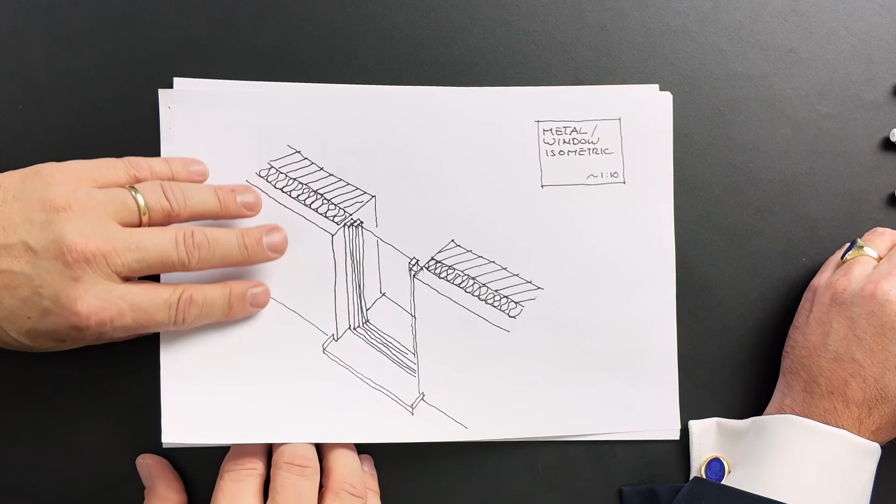So this is the general geometry, general layout. This is a section floor plan with very global positioning of the punched window in the facade. This is the aluminium version of the punched window in a ventilated facade.

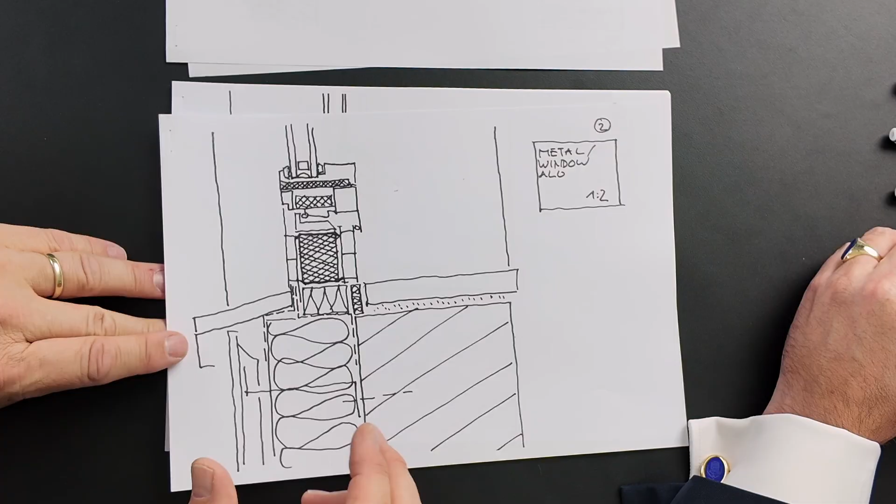We need to talk about how things are fixed, but we'll do that later in the deeper details. This is the wood version, and this is the aluminium version. I'm aware you're more into metal and aluminium, so this may be your favorite. This is the wood version.

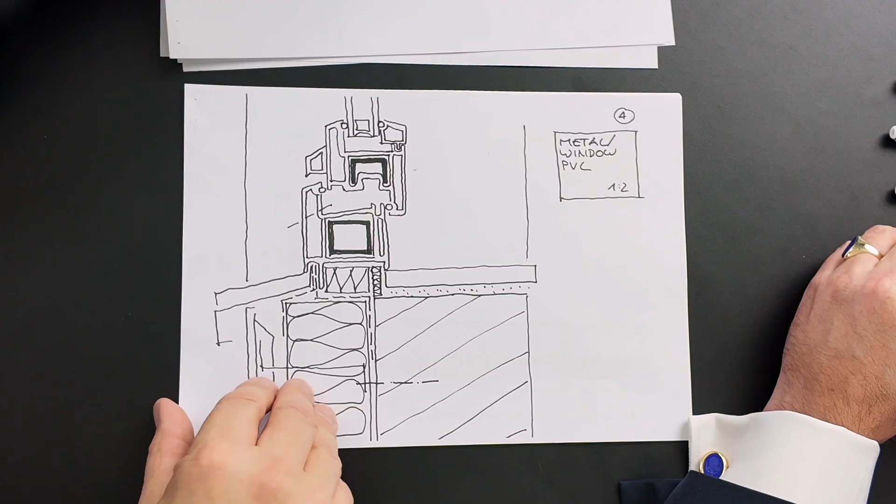In general, it works the same, also with the windowsill. And then the plastic PVC version as a setting.

Lines of defenses - anything I need to take care of from your perspective as someone who's installing it? I drew these dotted lines, they look nice, but I have to take care of the details. This is the setup which you would agree on as well.

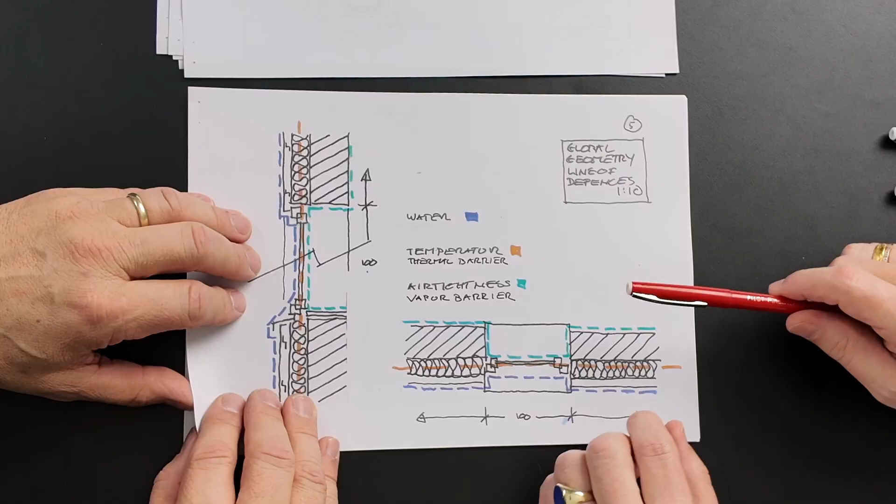Yes. So these 3 lines of defenses are very good for orientation for construction, because when you have to think about the right position for the window, it gives you a better indication of where to place it. The positioning of the window could go inside or outside, and you have to think about how the line would work.

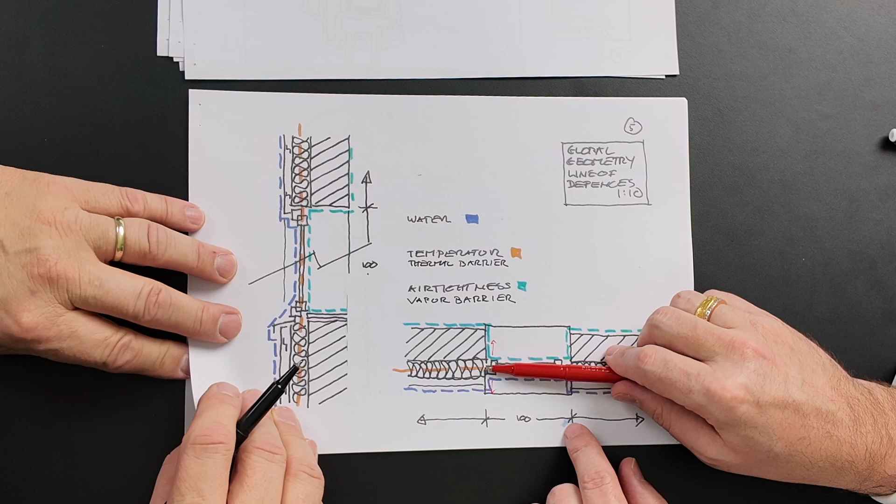In this case, it's idealistically drawn - the profiles and the zone of insulation of the window are directly in the line. Of course, aesthetically I could imagine having it more here or more here, but then the line of defenses would start shifting. I hope I've transferred it into proper detailing later.

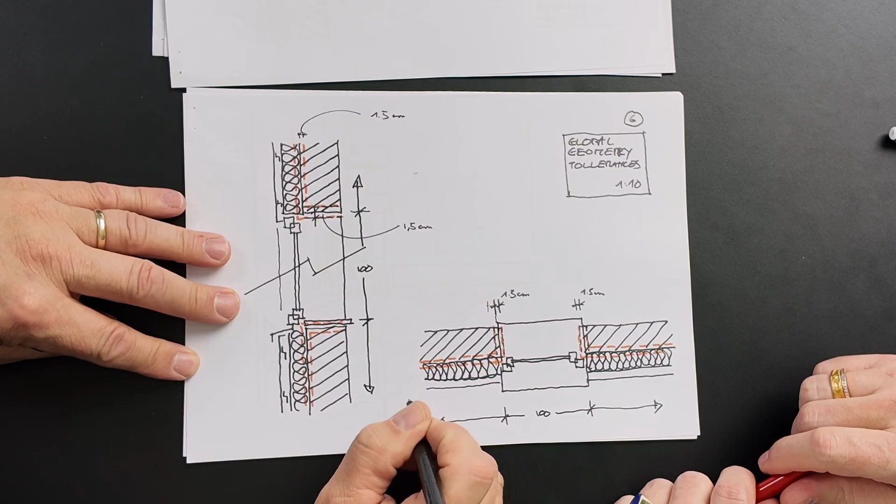Tolerances - I allowed myself a tolerance of 15 millimeters in one and 15 millimeters in the other, which means this is the line where I assume the main structure is, but I allow it to be either 15 millimeters wider or smaller. Is this something you would be happy to accept?

It's a point you have to consider every time. Normally on theoretical plans you won't find this inside and outside line of tolerances, but you have to consider it during construction. You have to point out how you can work with it.

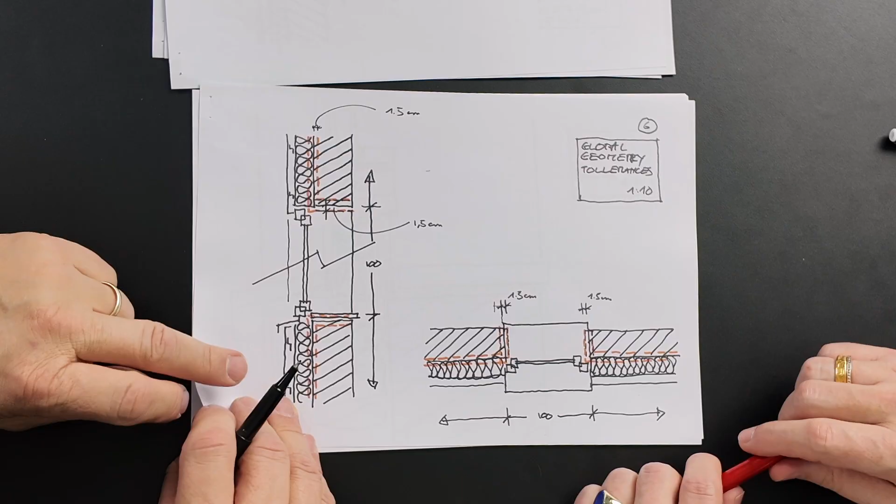If it's for one punch window, then it's not a big problem. I think in Germany the tolerances you have to calculate and incorporate in your construction is plus minus 15 millimeters, but it becomes more problematic if you have a punched window system or array in a ventilated facade, because then it becomes a kind of grid.

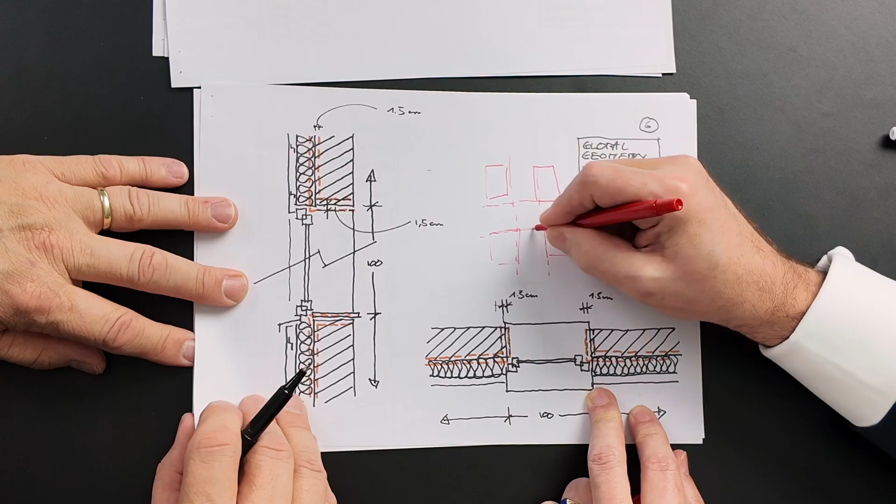And when it's a grid, you have to think about how to deal with the tolerances. So this becomes something and this becomes something, and the lines are not straight anymore. Then it becomes more problematic - you have to think about how to cover these tolerances so the ventilated facade and the panels remain the same. You need an overlap to cover the tolerances that come from the building shell.

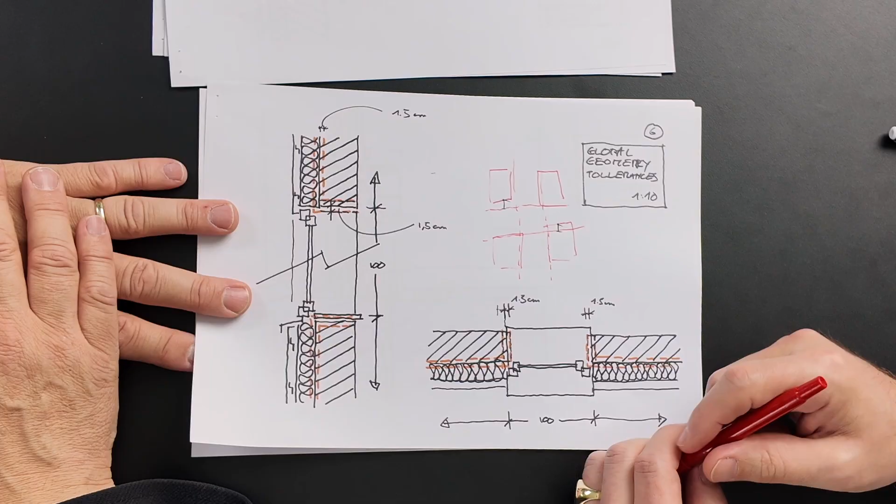So that's a strategic design decision - exactly where to put the lines in position relative to the windows. Yeah, that's a clear point.

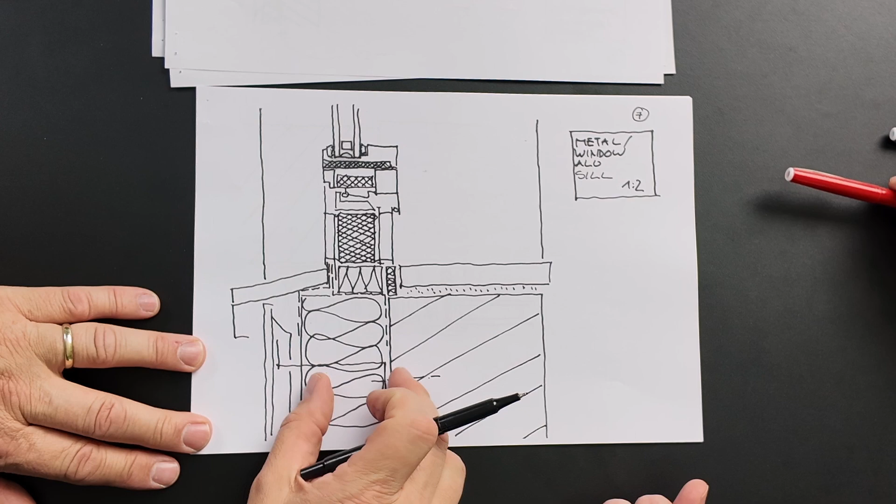Okay, let's come to the detail. This is the main vertical section - windowsill, ventilated facade, insulation, load-bearing part, the aluminium window, and then the line of defense - the outer rain, the inner air tightness happening here, and then the window itself.

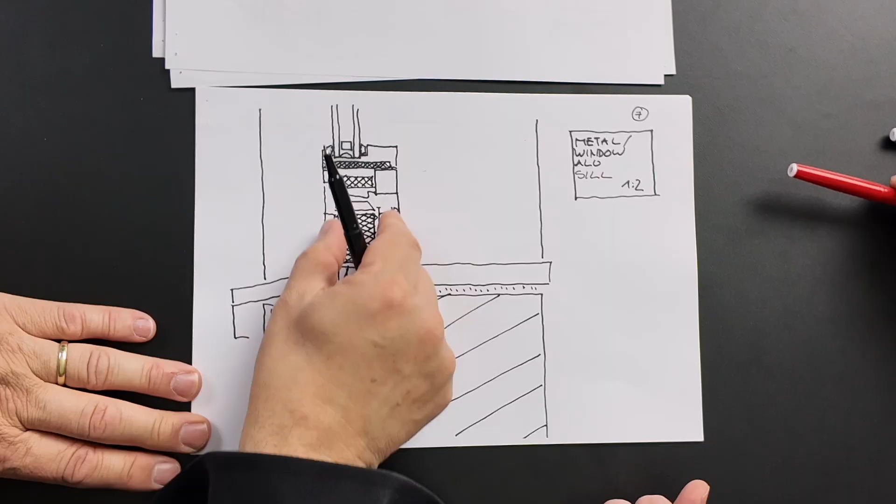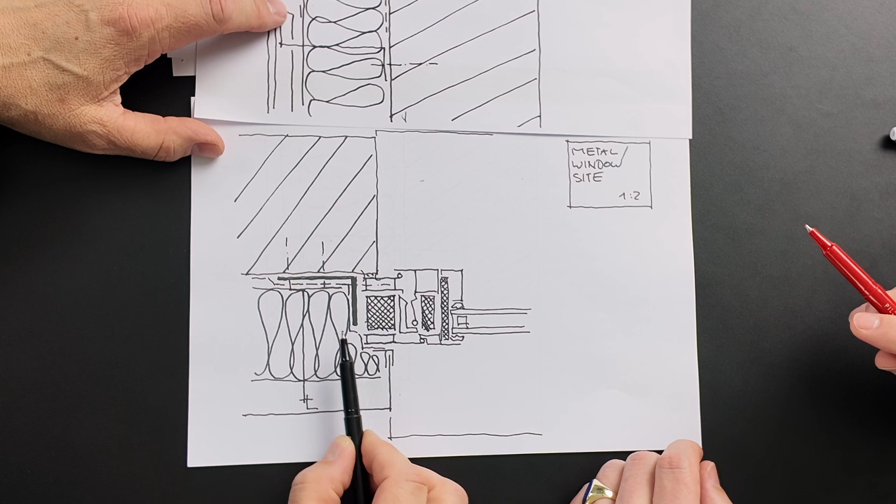Okay? It looks fine, it looks fine. Sometimes you have to think about how you want to place the fixing and the opportunity to fix the window itself. Yeah, I fixed the windows at the side - this is side window, horizontal, and this is where I fixed the window. So I have 3 brackets to position the window.

Body language tells me you're not happy. It's doable, but normally, maybe we are special, but normally we are used to doing it with a bracket - at the bottom where we have a bracket that can cover the dead load.

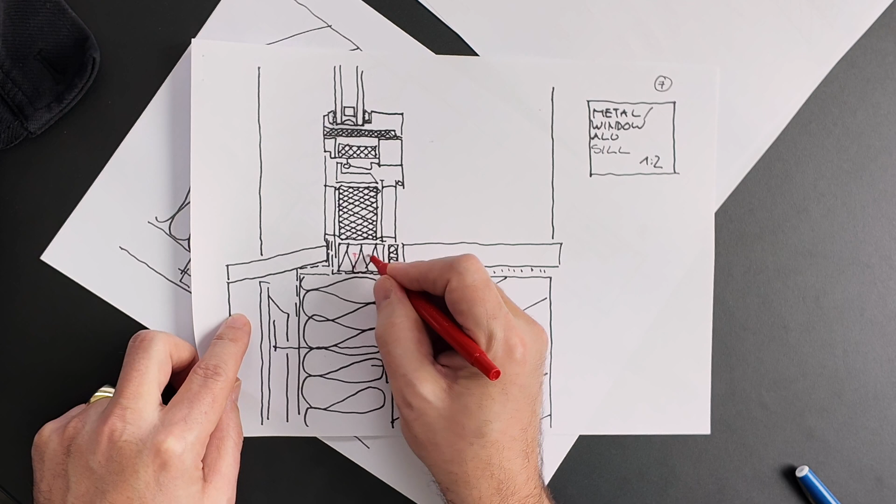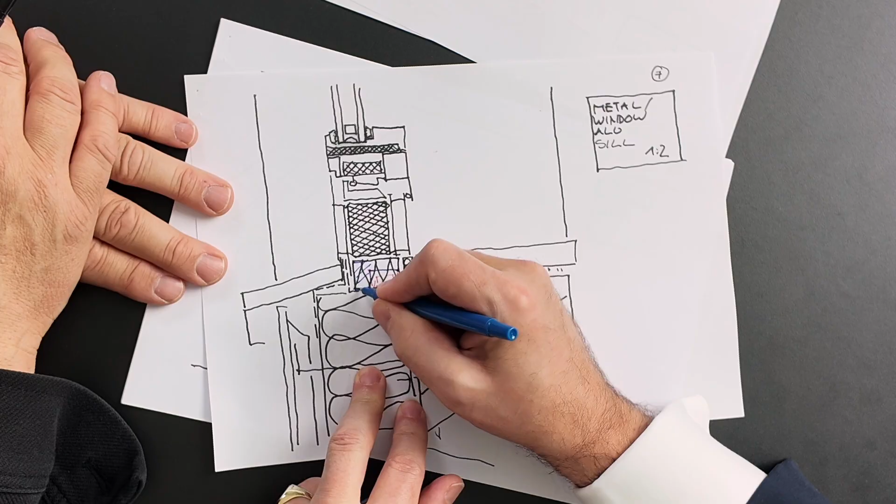And then you can think about a pressure-resistant PVC that can cover the dead load, or a steel tube in a way that's covered with pressure-resistant thermal insulation - let's take blue - that covers the steel profile to avoid a thermal bridge. Because otherwise it would be too close, and this may become a thermal bridge, okay.

And then I have this aluminium bar, this steel bar, which goes this way to cover the dead load, and then this is fixed to some brackets which are then fixed into the concrete.

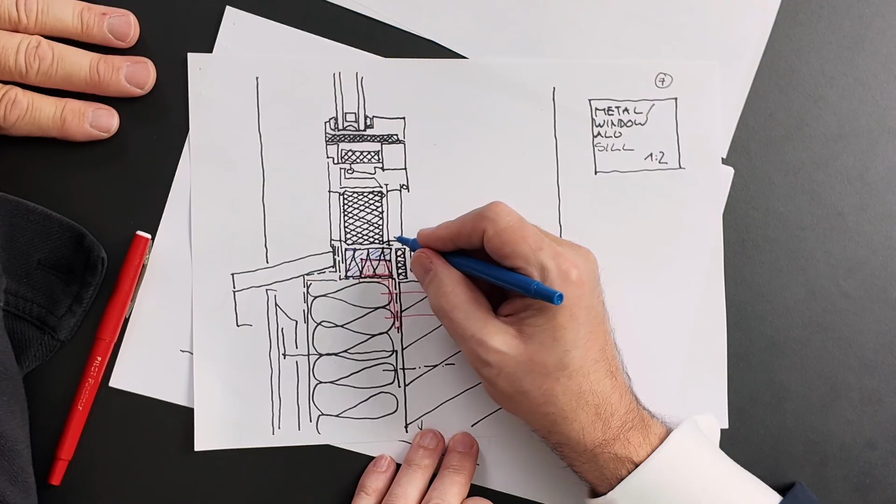So it needs to be placed correctly, because you can fix it through the profile that goes in. Actually this needs to be more here, so that we have a fixing point that can also carry the dead load and partially the wind load too. Okay, this is for dead load.

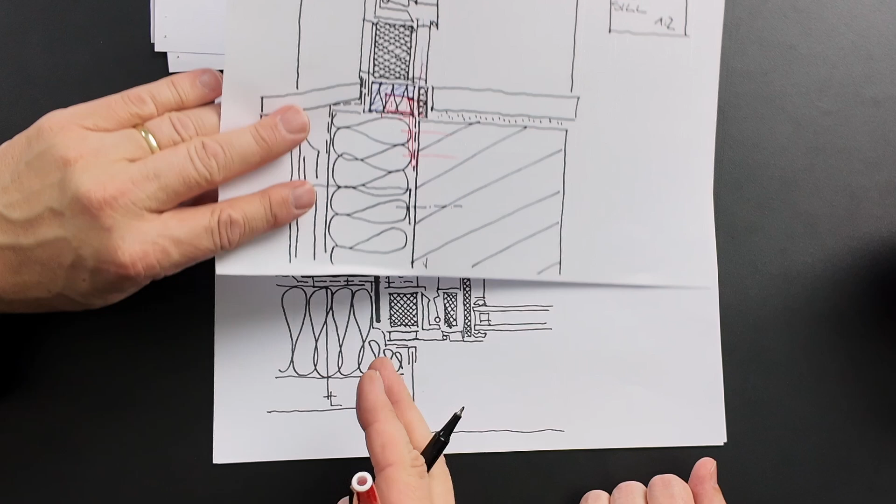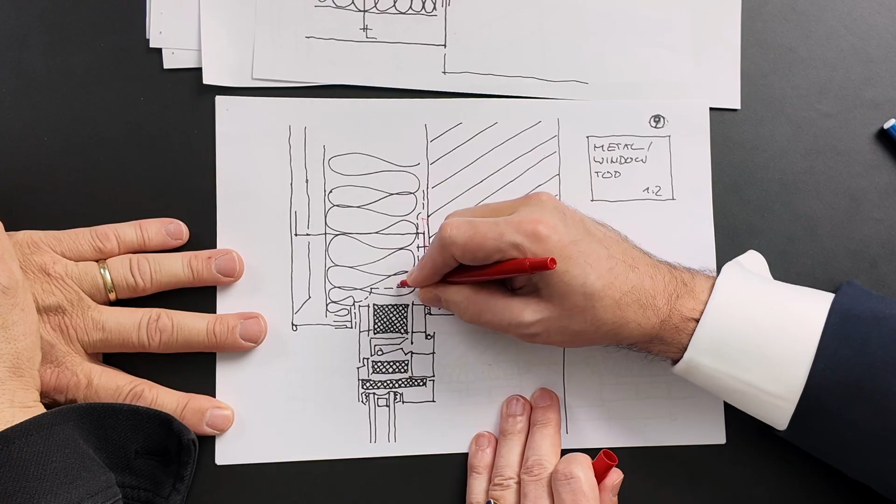But for wind loads, would I need these brackets, or do this at the top? It depends on the static calculation of the profile itself. When the profile is strong enough to cover the height of the window, you can use it at the top, creating a kind of bracket fixed at the wall, with a sliding element that can cover the wind load in this direction.

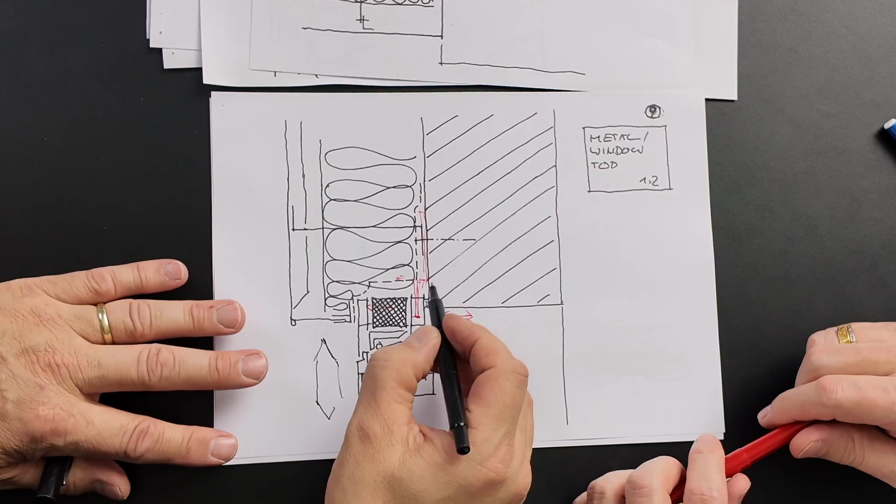There's movement in this direction. The sliding allows this to move while this stays fixed. I see, so I don't get forces into that one, and then I have this bracket fixed here, which is fixed again to the main structure, replacing this one. You only need it when you have a very high window with a very small profile.

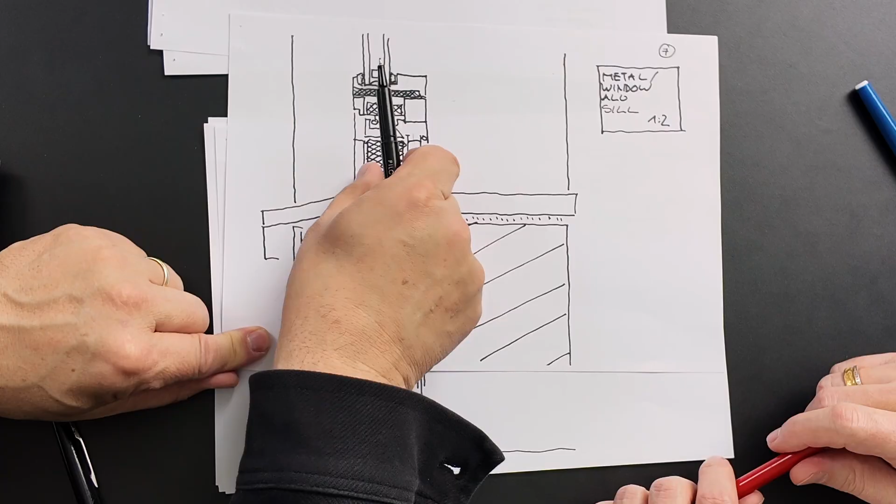Yeah, this is meter by meter, so it's not that much. Okay, that's great, good to know. When I think about air tightness, rain finds its way here, insulation, thermal break, insulation, fine. Air tightness is covered with this.

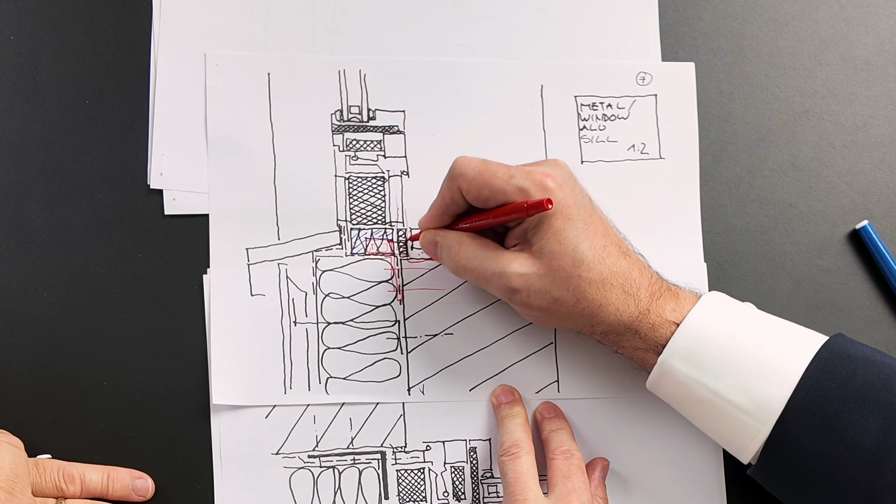This is every time a discussion, how do you want to install this foil for air tightness? Logically, it's good to have it inside and install it directly on the inside frame profile. This way it makes it really easy to do on the edges, every time in the same way.

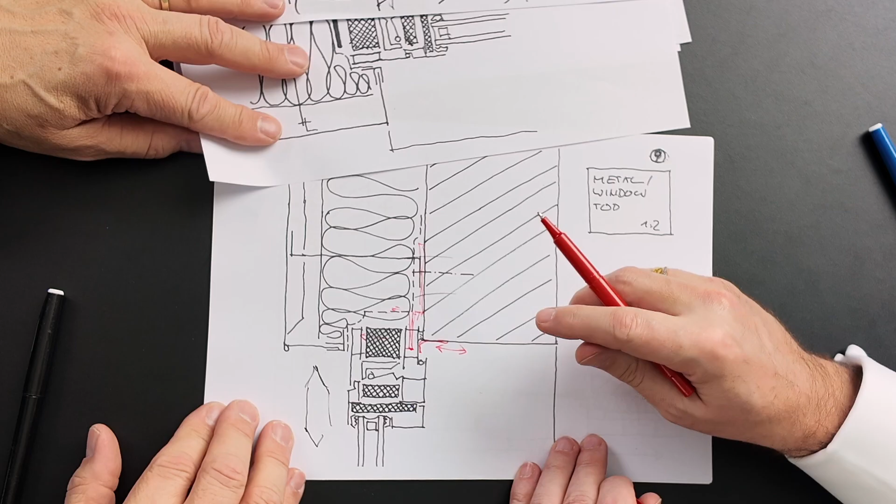But then I need to cover it. Then you need to cover it. It's a question of what will happen inside, and you also have to consider that this kind of foil needs an area where it can be fixed on the profile. Okay, so I may need to cover it here, or have this brought into position.

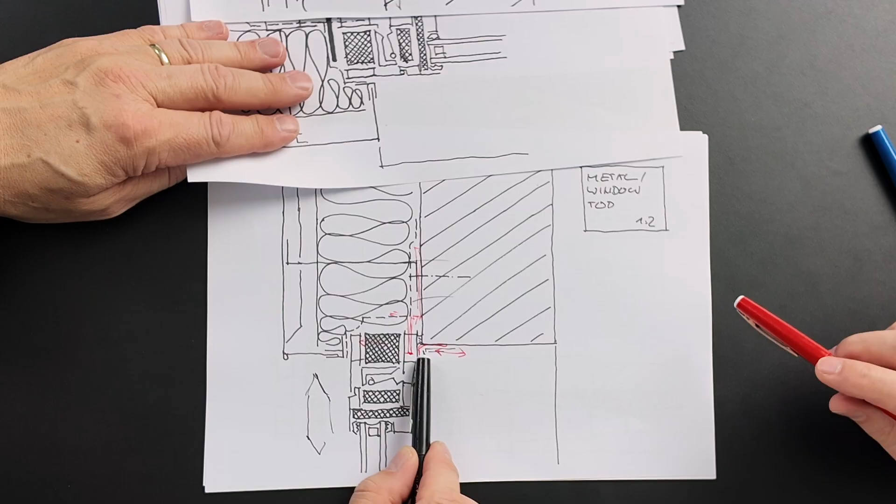Okay, this is one solution, and this is the other, and I understand your point. You have to make sure this always finds the coverage the same way, so I'm not going to combine this solution with that one, because then in the corners we may get a situation where it becomes really tricky to overlap these foils from the verticals and horizontals, so that it's really tight at the end.

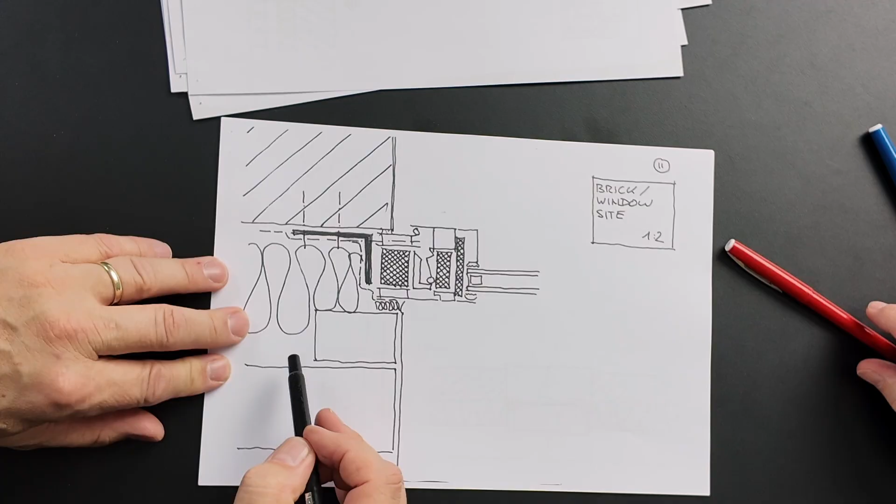Yeah, helpful, thank you. Now we go to the brick cladding. Brick cladding as a setting, same discussion: the tightness here, the brackets, which may be at the bottom or top as an alternative. Any comments on this? No.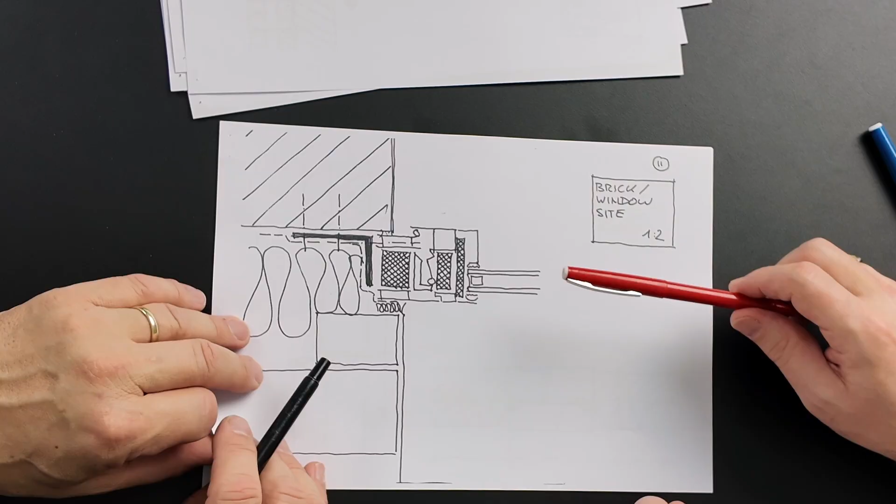From this perspective, the combination between window and ventilated facade - you have to see it separately, window construction and ventilated facade, because the function of the window has to be there also without the ventilated facade. The purpose of the ventilated facade is to cover the insulation so it doesn't become wet.

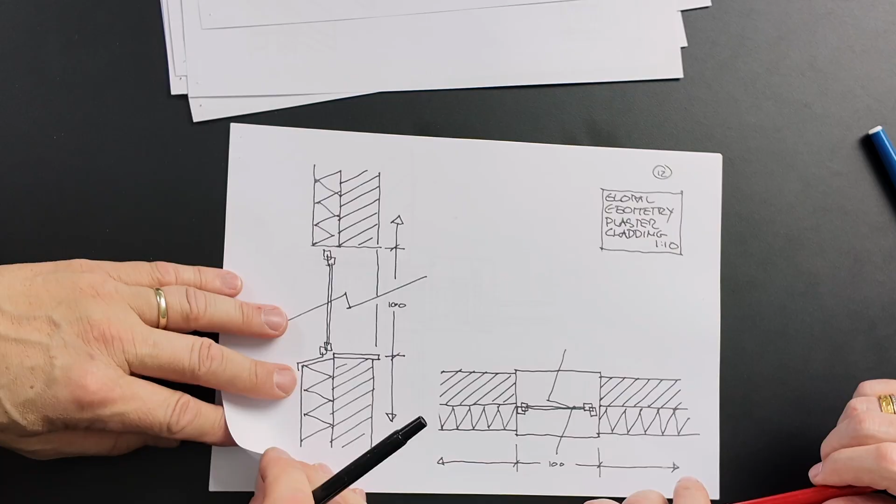So this is rain cover, and this is insulation, which brings us nicely to the next one, the plaster version. There we have styrofoam hard insulation covered with plaster. So this is the plaster, this is the aluminium, and then the foil again for tightness, and this is one piece. Comments on this?

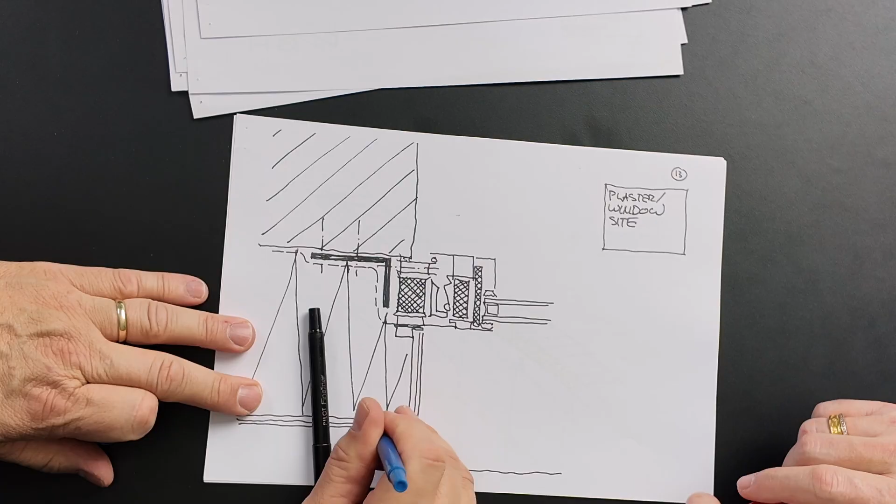Plaster facade is, to say it this way, every time really complicated, because in comparison to a ventilated facade, it's not allowed that water can come in. Any water here is a disaster, because it destroys the structure of the insulation and of the plaster itself.

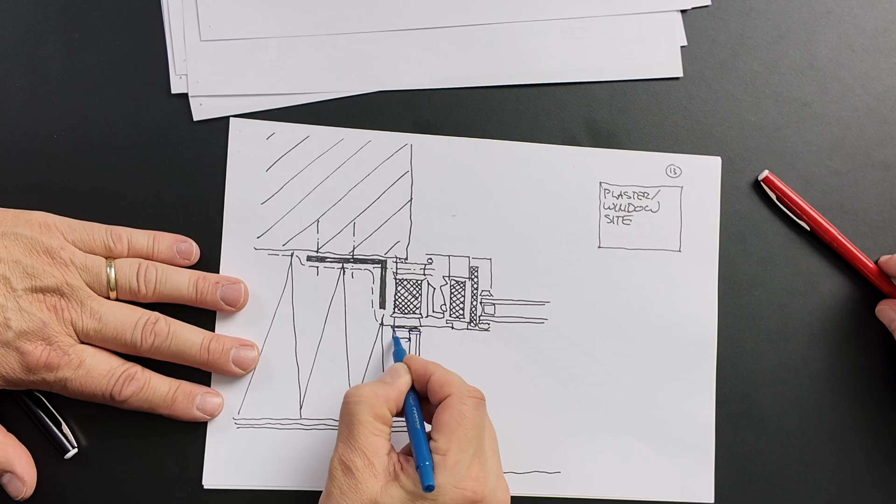So it means you have to be 100% sure there is airtightness between window and plaster facade. So I took here a profile from the shelf from the system supplier, which is meant to be the profile where they finish the plaster at, and that just covers the whole thing.

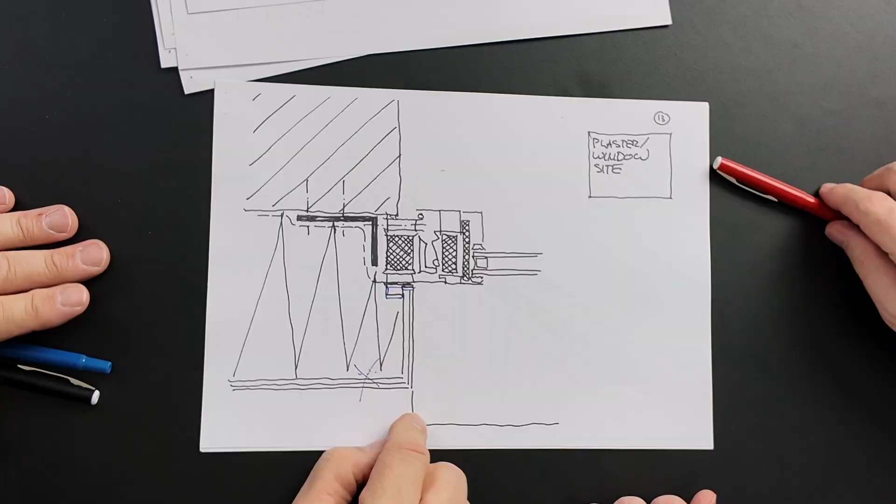It brings you to a problematic situation when we think about the bottom point, because when you're working with a window sill, the discussion is where the window sill is really brought in, and how it looks from the side - how the plaster facade interconnects to the window sill.

Okay, well thank you. I learned I have to take care of some brackets and rethink some of the foils, but that helps a lot. Thank you, thanks a lot.